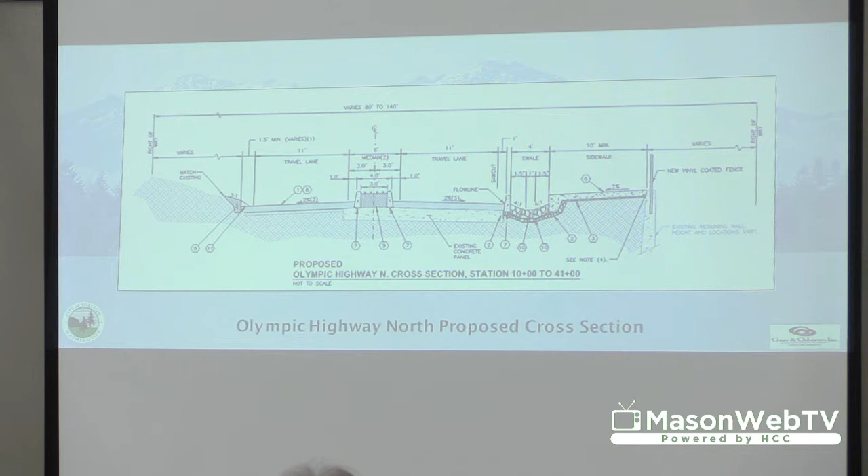And the other big thing we heard from the pedestrian community was this area where we have that very ugly Jersey barrier right now that divides the lane of travel from the sidewalk. What we tried to do was provide a little more assurance that a vehicle couldn't get to that sidewalk. With that 6-inch curb, they would have to go over a 6-inch curb through a 3-foot depression to get onto the sidewalk. So providing a little safety for our pedestrians.

This is a rendering of what the proposed improvements would look like. Again, you've got the 2 lanes of traffic, the broken center divider island, and the swale on the south side. That swale on the south side of the roadway is also where all of our traffic lighting, overhead lighting, and pedestrian lighting will go. That was another thing we heard from the community, the need for better lighting and pedestrian lighting. Not a lot of pedestrian lighting up in that area. So this entire project is getting brand new lighting from C Street at the top of the hill all the way down to First Street, meeting RP8 requirements for spacing.

This is the preliminary design for our overhead lighting. As you can see, on the upper level is the street lighting. Down here on the lower level would be the pedestrian lighting, with some added features of hanging flower baskets and also the possibility of a banner on those.

And if there are any questions, certainly feel free. I know at the last meeting it worked really well that we tried to field all of those questions as we went through each one of these slides, so that we didn't miss something as we went along.

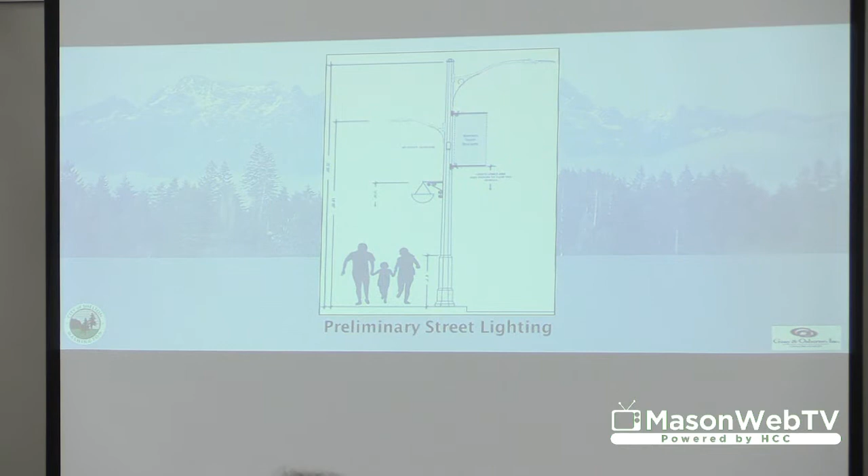So if you do have any questions, we certainly have the experts up here to field those questions, and we can do that as we kind of go along. Yes? The north side of Olympic Highway North becomes basically a drain for storm water runoff. And down by the library, it actually flows to the point where you can't really drive in the right way. So is all that being managed as part of this?

One partner that I failed to mention was Mason Conservation District. They are not represented here tonight, but they are one of the partners. Would you like to come up? Andy's requesting a mic. This is right here. So we do have a representative here from Mason Conservation District. Sorry, John, I didn't see you walk in.

John Bolander with Mason Conservation District partnered with us, and they have been working through some of those drainage issues, not only on the roadway itself, but also on some of these side roads. So we're getting an awful lot of drainage that comes off of B Street, and also the end of 12th Street, which is an undeveloped road that washes down onto Olympic Highway North. So we have addressed most of those and feel very confident that we have picked up most of that stormwater and kept it off of that roadway where we're getting those issues.

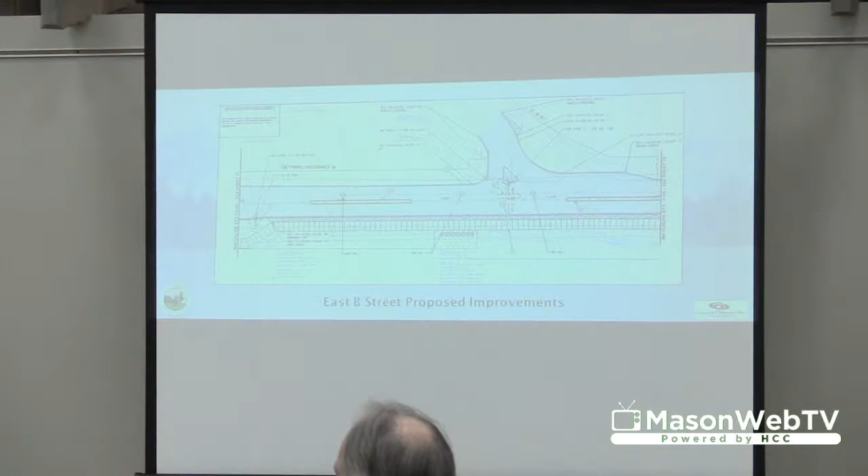So the question is, at C Street, when you're coming up the hill, why is there not a left-hand turn lane? It was an issue for us. It's been an issue, I think, for this community for quite some time. We have addressed that with this project, so there now is a designated left-hand turn lane at the top of the hill, and a through traffic lane getting by that. So we've addressed that issue. We heard the community, and we have addressed that.

So this is moving back down the hill from C Street to B Street. Yes. Going down Alder, if it's going to be a two-lane road, I have a real problem wanting to go to the library. I have to go down to 7, turn left and come in. Most people will block traffic and wait to get in that first entrance. It'll be worse if it's only a one-lane road going down. And we'll address that one as we move down also.

So this is B Street coming off. So basically where we've got that yellow triangle now, with the center divider island coming down, you will not be able to make a cross-traffic left-hand turn going down the hill onto B Street. There will be a single lane coming off of B Street onto Olympic Highway North, and a designated turn lane onto B Street in this area here. So a designated turn lane and then the through traffic.

So we did try to address, knowing that we had one lane of traffic, any place that there was going to be congestion, we tried to designate one turn lane to get traffic out of the flow of traffic. So moving down the hill and getting back to the Cole Loop question. So this is the first entrance into Cole Loop on the south side of Olympic Highway North, and you will not be able to enter.

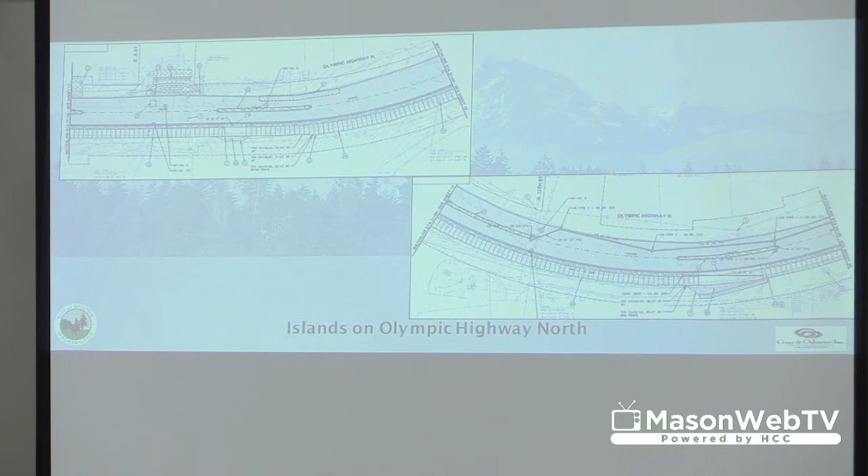So with the Jersey barrier moved. Right now, the Jersey barrier for us blocks all the headlights and a lot of the traffic noise going up and down that highway. So if we remove the Jersey barrier, then what we're gonna have is all of the headlights and everything coming up and down the hill all exposed now.

Is there gonna be some fencing? Because between the sidewalk and that loop road that you're talking about, there's quite a drop down to that road. Is there gonna be like one of those privacy fences like they have on, is it North Cliff? They have kind of the green privacy fence thing. Is there gonna be something like that there?

So the question is, is there going to be a privacy fence on the back side of the sidewalk, is what I'm hearing? And yes, there is going to be a fence on the back side of that sidewalk with the privacy slats installed in that. So you should get a little reprieve from any of those headlights onto your property.

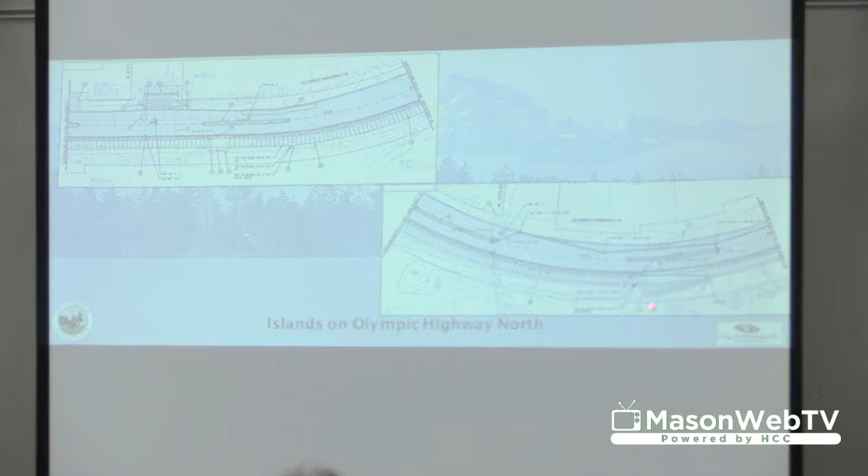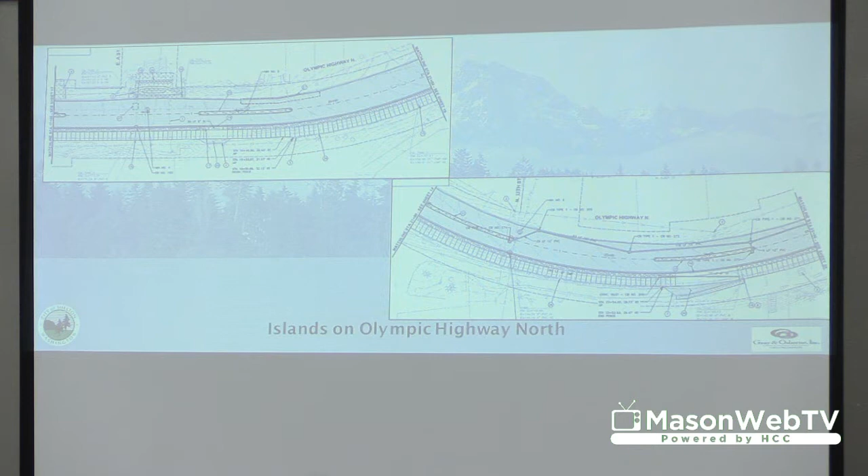So moving down the hill, this is the other entrance or exit out of Cole Loop. So basically, again, trying to discourage traffic from making that left-hand turn and impeding any kind of traffic flow moving in that single lane up the hill, we're placing a raised center barrier on that section.

Moving down the hill, so we heard a question about what do we do about this traffic coming down the hill that likes to stop and try to make that cross-traffic turn onto 8th Street. So the proposal is to make an MTA official bus stop with a shelter on this leg of 8th Street, a sidewalk extending across that area, along with a rain garden that would be installed up to the entrance of the library. So blocking off 8th Street, and the loop would be back through the library. So we're eliminating any of that stop traffic that's coming down the hill trying to make that cross-traffic turn.

You have to go to 7th and make a left at the light. You would have to go to 7th and make a left. Correct.

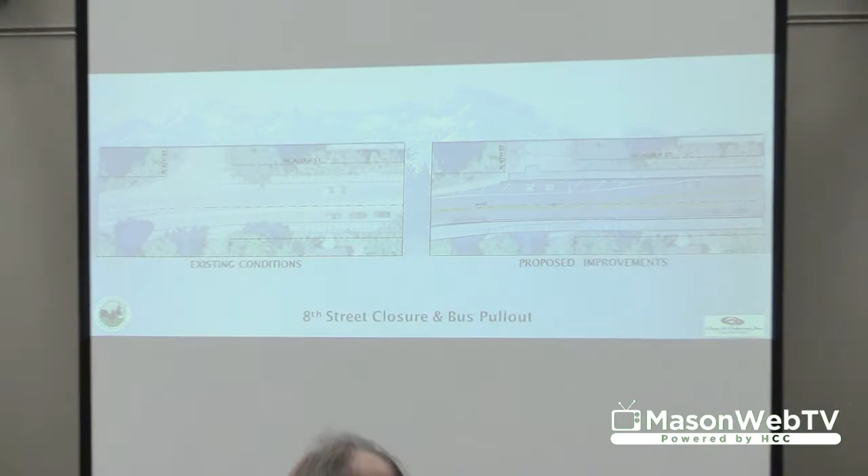Yes? I looked at the cross-section of the road as it comes down, and as it sits now, the road itself actually sways like this, and you have the water that comes down on the east side of the road coming down from B Street. And then the pitch of the road shifts the other direction. And then the water comes all the way across the highway and goes into the swale on the other side. Now, with the new contour, it looked like you were going to hold the water on the east side of the highway as it went down, but without a swale. So are we just keeping that water on that side, or are we funneling it across the road the way it is right now?

So when we looked at the funding to start with in this project, you did see about $500,000 worth of storm funds that were going into this project. Right. So we have addressed most of those water issues. We're trying to pick up that water in strategic locations so that we don't have that issue. So we are going to put some drains in on the east side of the road. Yes, certainly. And like I said, Mason Conservation District has been helping us with a bunch of those projects.

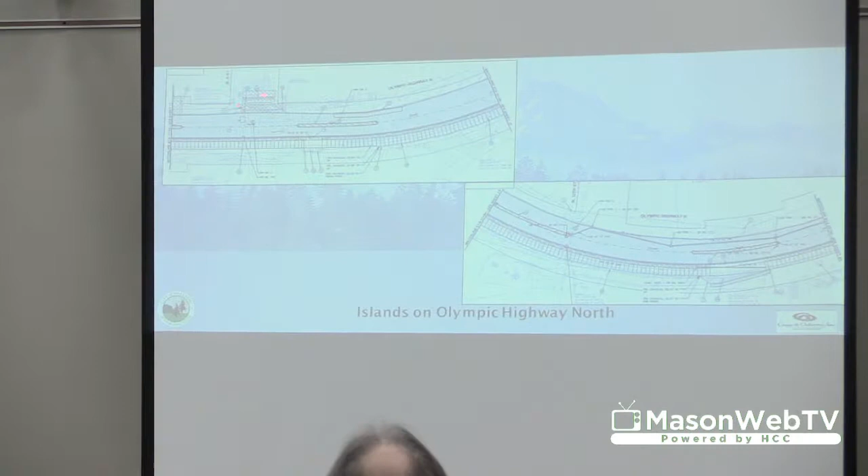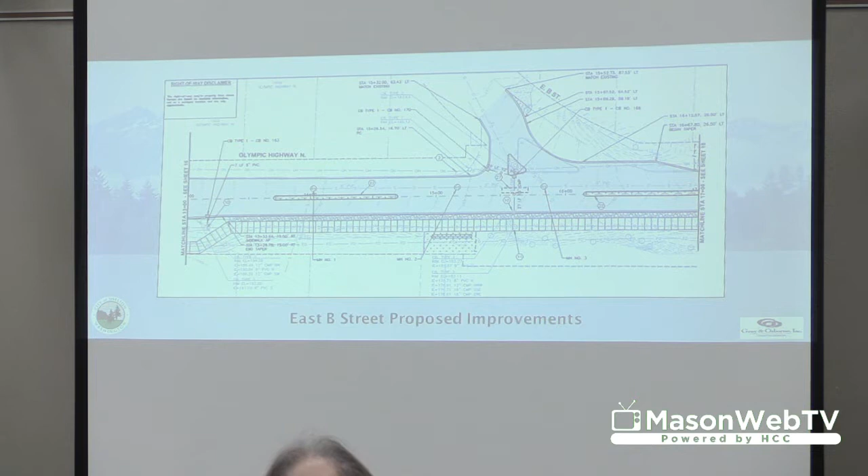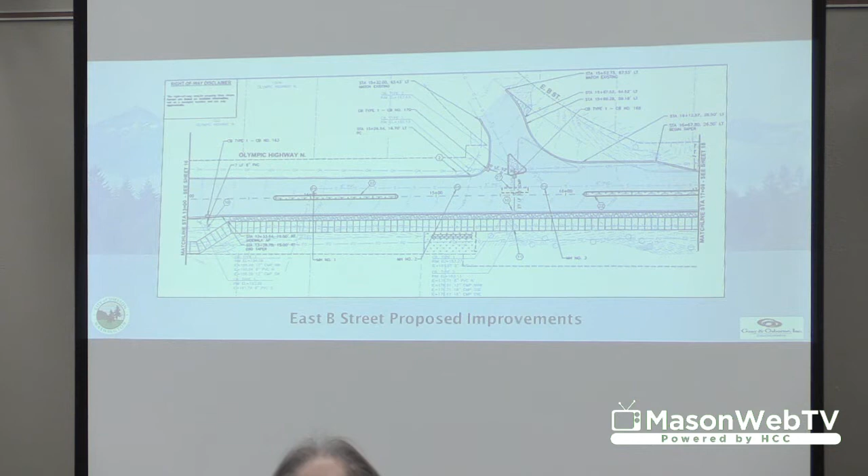So you see this area here, this is A Street. We get an awful lot of water that comes off of A Street with no drainage. There's a proposed rain garden at the end of A Street, blocking off A Street. Also one in the area coming off of basically the alley that comes back behind the old Dr. Busaka's office and comes out onto Olympic Highway North. So another rain garden here, catching a lot of that water, and then some storm drainage strategically placed up and down that hill section to catch that drainage.

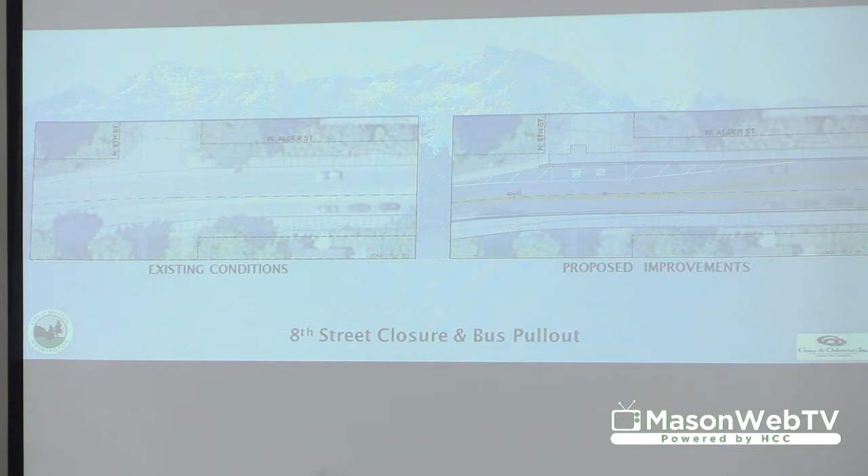On the east side? Because you were just going to use your swale to run down to the drain. We are not proposing to put any storm water into that swale. We've got issues with drainage onto that critical slope. So we're going to try and keep all of that water in the conveyance system down the hill and into that bottom section down to 7th Street. Correct. Thank you. You're welcome.

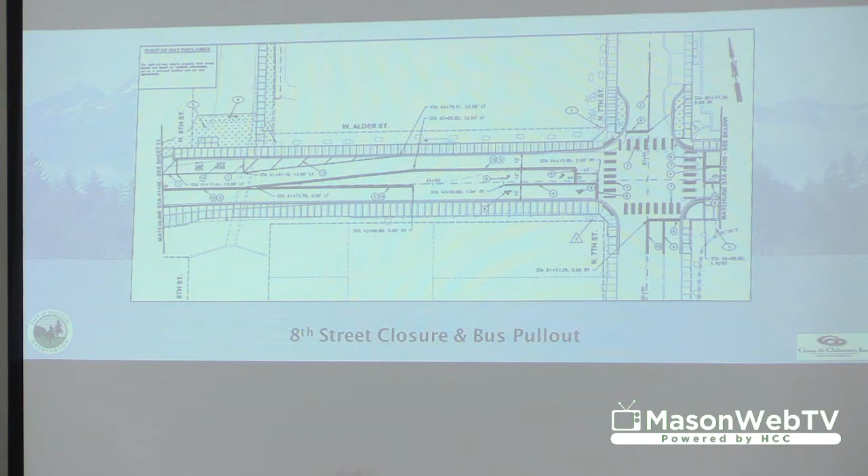So moving forward, this is another view just of 8th Street and the 7th Street intersection. Again, blocking off 8th Street with that bus pull-off and some rain garden at the end of 8th Street to catch some of that stormwater before it gets out onto the roadway. Once you get down to 7th Street, that road profile changes a bit. We are now down to two 12-foot lanes, no center divider island on the flat section, and continuing the 10-foot sidewalk along with a planter strip on both sides.

The north side of the road will contain in that planter strip from 1st to 7th Street, Logan, about 30 trees? 35 trees planted within that planter strip on the north side of the road. And then another, this actually says a 6-foot sidewalk on this slide, but it's incorrect. It's actually an 8-foot sidewalk on the north side of Alder Street.

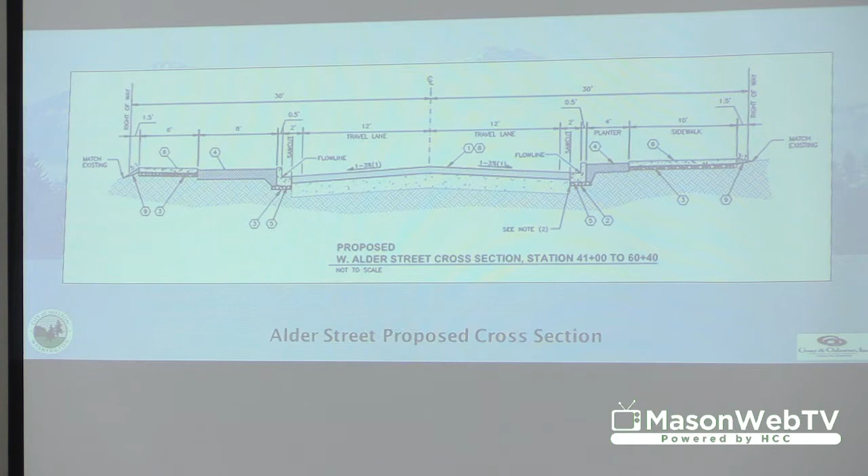I have a question about the trees. What kind of trees? And is it going to be the cement? I mean, where are the trees going to be planted? So the question is what kind of trees, what species of trees, and really, I guess, location and how they're going to be planted. And I think Logan might be able to speak to that a little better.

I'll just talk about it. So basically the spacing of the trees is about every 40 feet. There's 5 blocks that are gonna have enough planter strip to have the trees in them, so that gives you about 7 trees per block. We've selected 2 different species of trees. I have the pictures up here if anybody wants to see them afterward.

If you're familiar with trees, one of them is a golden bell tower ironwood. The other one is a European hornbeam known as the Frans Fontaine. So we chose 2 different species of trees in case of disease, so it won't pass. We're gonna alternate each tree so that if some do get disease, it doesn't affect all of them. And just in case there is poor performance, they won't all perform poorly.

So the planter strip, what will that consist of? Is that in a cement box or is it planted in the soil? No, so you're gonna have the sidewalk that you see on the left, and then you're gonna have basically a 4-foot grass strip with enhanced soils in the middle, and a root barrier that runs along the length of the sidewalk that'll prevent the roots from getting under the sidewalk and causing problems in the future.

So, yeah. And those trees, again, our partners, Mason Conservation District, gave us 6 selections to pick from. We picked 2 of those, but those were recommended by the Conservation District to be the best performers for our climate in this area downtown.

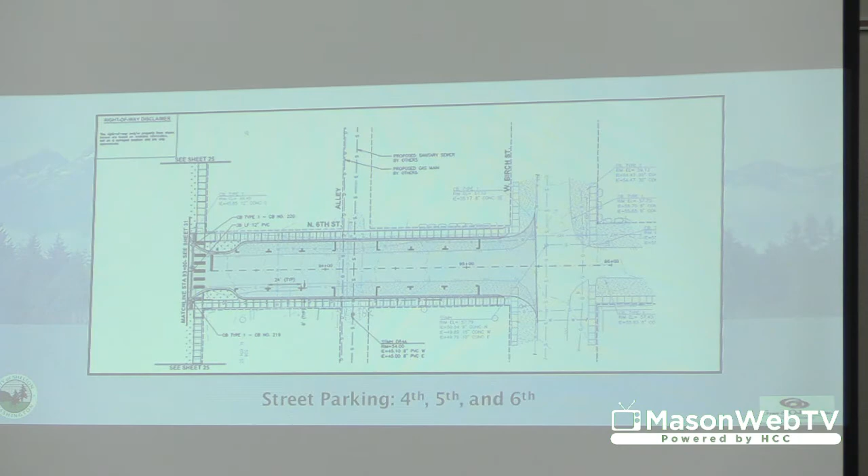Sure. I'm a little confused as to what you're going to widen on the street. So the question is, what are we going to widen on 4th, 5th, and 6th? So if you're familiar with those roadways down there, they are very narrow. Right now, they are just 2 lanes of traffic, no on-street parking, and then a planter strip on both sides between the lane of travel and the sidewalk. There is about 10 feet between the curb now and the sidewalk. So we need about 8 feet for parallel parking. So we would pull out that curb, pave that new road all the way back to the sidewalk, creating enough room for on-street parking on both sides of that road. From Alder to where? From Alder North to Birch Street. So basically just a block north of Alder Street on 4th, 5th, and 6th.

Sure. On those trees that you're going to be taking out, whereabouts are you on Alder, between what streets? Question was, where are the trees at that we're proposing to take out? There are some very old, I think they're birch trees, down between 2nd and 3rd on the north side of Alder Street, which we would be taking out with all of the infrastructure that we're putting in, the new sidewalks, new pavement.

If we left those trees in there, most likely we would damage the root system, and then we run into issues of those trees becoming unhealthy and possibly falling over in a windstorm, something like that.

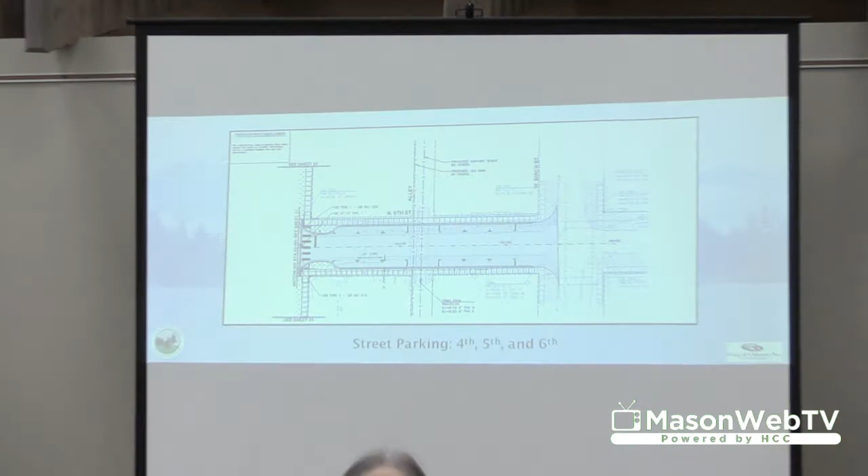And right now, the county and all of their officials have been on board with moving that traffic to the other side of the street and actually gaining a few parking stalls. Can't you just move some of that towards the courthouse? You're still going to be backing out into the traveled way, one way or another. You would end up losing most of that grass and landscaping in there. I'm not sure that's something we really want to do to one of the nicest looking buildings in downtown Shelton. And we've found a way to mitigate that parking issue on the other side of the street.

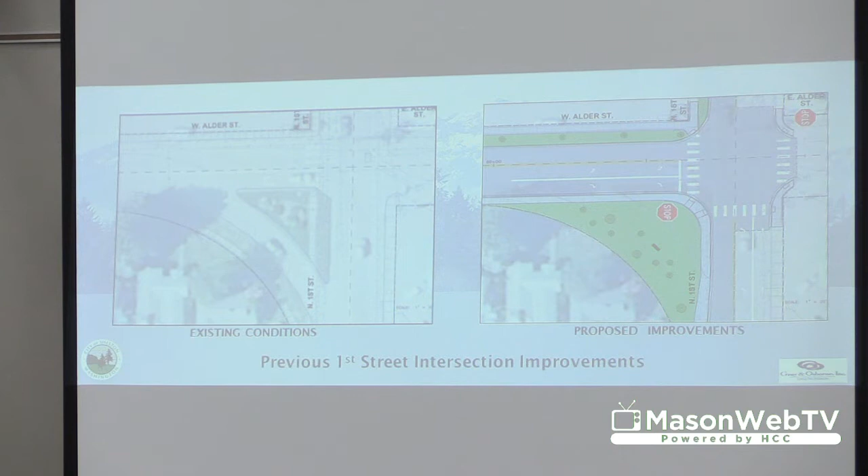So moving down to the First Street intersection, this is what was proposed back in October when we first met. It was a T intersection. You had that old slip lane that came through on the south side of the triangle. So this was the configuration that we came up with, the best possible option back in October: free movement north and south on First Street with a stop sign heading east and west on Alder. We had some serious concerns on the backup on that west leg of Alder Street.

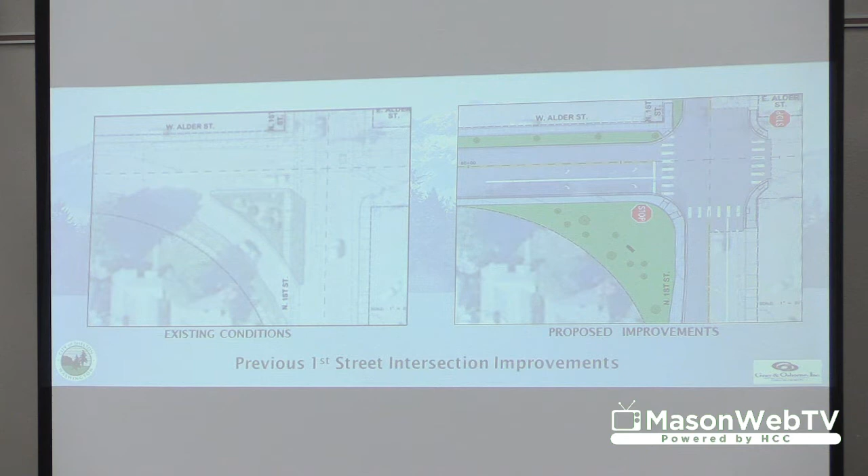And we also heard from the community in that meeting in October that everybody was concerned about speeds coming down that roadway and traffic volumes on that north-south leg of First Street. So we worked with our consultant, Gray Osborne, and also our partners at WSDOT, and came up with a roundabout that fits into that triangle.

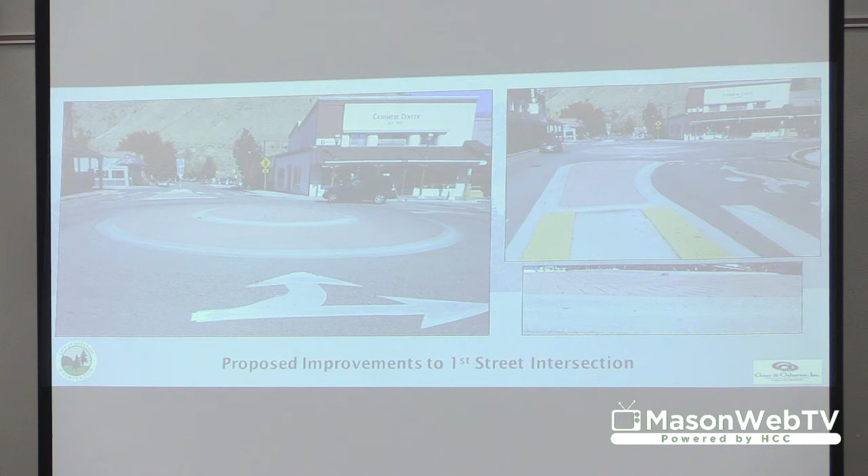So this is a compact roundabout that was installed over in Cashmere. I am going to hit on a couple of these points, and then hand it over to our experts for any questions you might have. This is one example similar to what is proposed to go in at First and Alder. And this is the actual configuration that you might see out there.

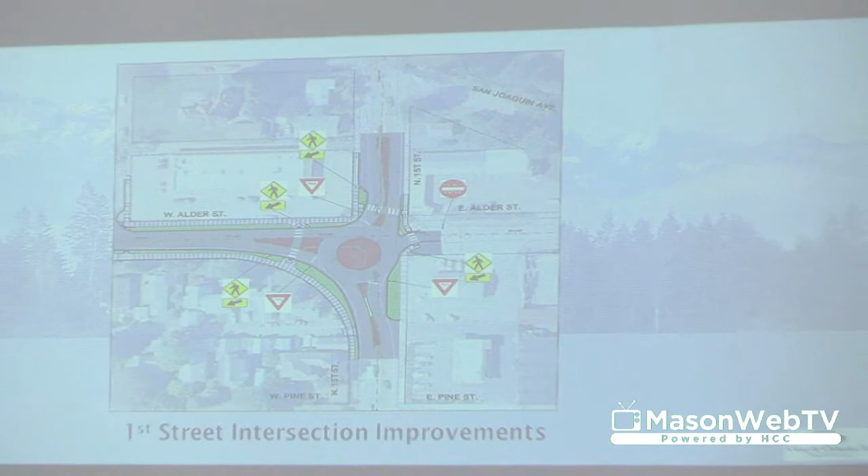So this is Subway, Dr. Blevins' office, Mickey's Deli. So north-south on First Street, free-flowing traffic through that roundabout. This leg that goes over towards the motel would end up being a single leg off of that, but no entrance onto it. So this would turn into a one-way street coming out of the roundabout through that intersection. And with that, I am going to hand this over to Denna and Brian, and they can explain some more and field some questions as they come up.

Good evening. My name is Brian Walsh. I'm joined by Denna Spires, as we were introduced earlier. And she wants me to stand up. Okay, so we're going to stand up. We're going to go through about 12 slides and touch a little bit on roundabouts. And with Craig's rules here, if some questions come up, Denna and I are very comfortable in answering those.

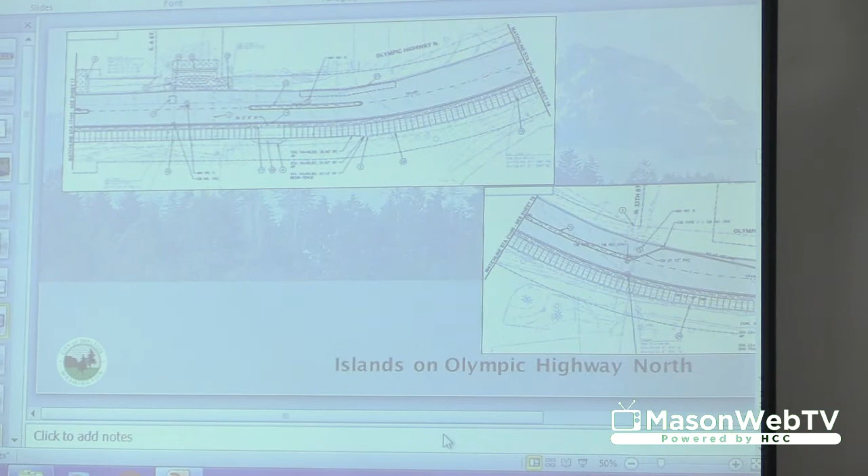So that next slide, if you can maybe just forward it there. You've got it. I got it. Thank you, Craig. Sorry, I'm going through this again. I must have hit the wrong button. Now, Brian, this is how you treat your guests? We have an issue. We're going to take a quick break. Okay. We'll get right back to you. Thanks.